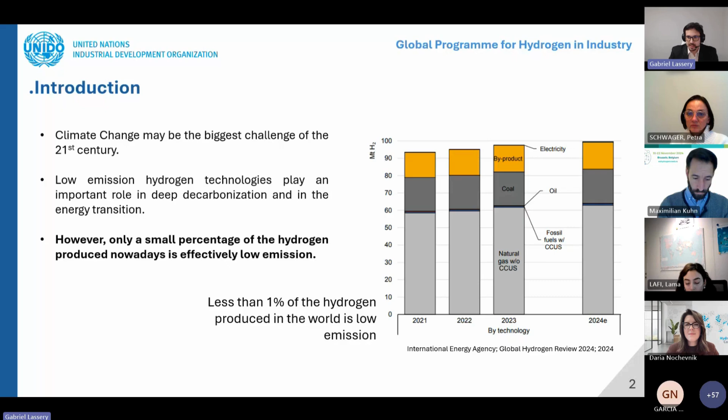I'd like to bring a few numbers over here. In 2021, the global average of emissions for hydrogen was around 12 to 13 kilograms of CO2 equivalent per kilogram of hydrogen. That means that each kilogram of hydrogen produced emitted about 12 to 13 kilograms of CO2 equivalent. And considering the IEA net zero scenario for 2050, we should lower this average global emissions to 6 to 7 kilograms of CO2 equivalent per kilogram of hydrogen in 2030 and reach less than 1 kilogram of CO2 equivalent per kilogram of hydrogen in 2050.

And moving to this picture here on the right side, I hope you can see my pointer. Yes.

But how can we ensure a fair and consistent comparison of hydrogen produced across different technologies, different sources, and different batches of hydrogen? To raise this question, I brought this picture: how much is one apple plus a star plus a chess piece? Well, it actually doesn't make much sense.

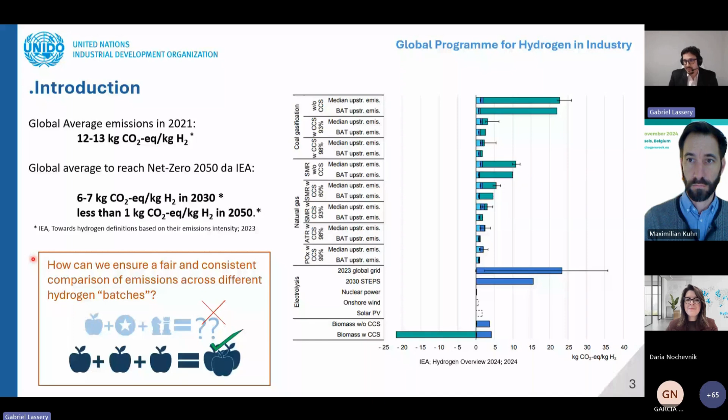The ISO TS 19870 is a unified, internationally recognized framework for quantifying the greenhouse gas emissions in the hydrogen supply chain up to the consumption gate.

The work of this technical specification started in ISO in 2023, but actually this document started way before in IPHE in 2019, I believe, with almost the same name associated with the hydrogen up to the production gate. During this step in 2023 in ISO, this document served as the basis for this technical specification, along with the family of our LCA standards, ISO LCA standards.

All in all, this document fosters international hydrogen trade and development by providing regulatory certainty, policy signals, market growth and transparency. It is a technology agnostic approach because it focuses on quantifying greenhouse gas emissions across diverse pathways, and it represents the first step towards establishing a family of ISO standards for partial CFP in the hydrogen supply chain. I have a slide on partial CFP later, but first I'd like to raise this question.

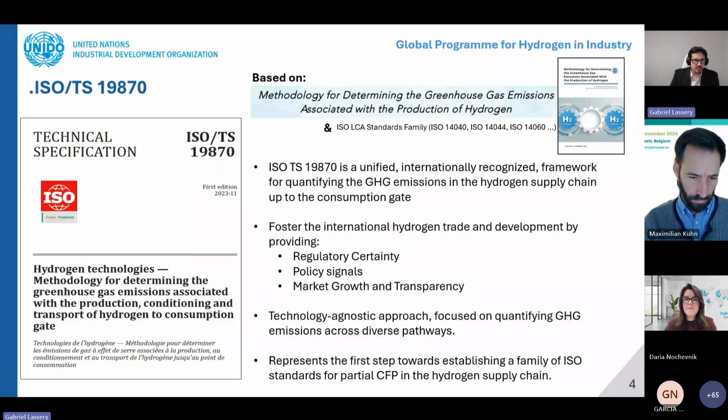What are the benefits of standardizing greenhouse gas emissions assessment using this technical specification, using the ISO TS 19870? And to help us with this answer, I'd like to invite Mr. Laurent Antoni, who is the Executive Director for the IPHE. Mr. Laurent Antoni, the floor is yours.

Thank you very much, Gabriel. Yes, I think the main question is why do we need this kind of standard? You already mentioned that a little in the introduction speech, but if you go back to the history, everyone wants now to move to clean or low emission hydrogen. Why? Just in order to decarbonize our economies.

And we know that from hydrogen, some countries will produce more than they consume, and others will consume more than they can produce. So this means we will need international trade of low emission hydrogen. This means that we need to create a hydrogen economy to decarbonize our economies. And of course, that means we need to agree on what low emission hydrogen means.

And this is exactly where we are using sometimes some colors, but I think we should all be colorblind. What matters is the carbon footprint. And that's why we need to agree how to measure, how to quantify the greenhouse gas emission from the hydrogen we want to use in order to decarbonize our economies.

And that was, of course, one easiest way: to certify that the hydrogen we are using is really low emission. But then we still have to agree on the value to quantify how low emission it is.

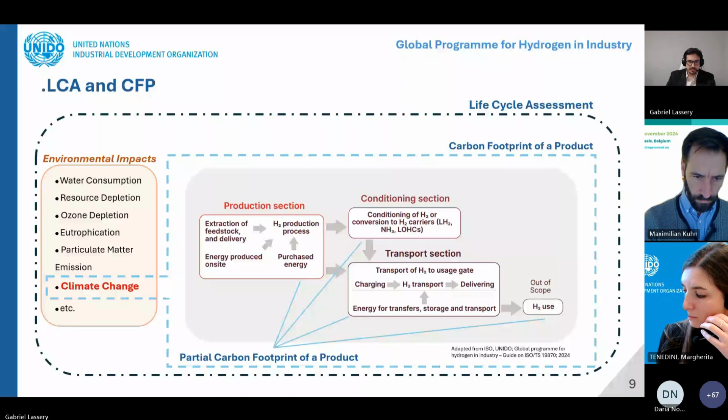For the second phase, the life cycle inventory analysis, it collects and organizes data on greenhouse gas emissions across the selected stages of this product's life cycle. For the life cycle impact assessment, it calculates the greenhouse gas emissions in kilograms of CO2 equivalent using the global warming potential coefficient and the data obtained in the previous phase. Then there's the interpretation phase, where it conducts sensitivity analysis, performs critical reviews, and reports the results.

Going into the first phase, the goal and scope definition guidelines - this is the foundation phase for a CFP assessment. One thing important to highlight is that this phase may be refined due to the results obtained in the following phases.

For example, when doing your sensitivity analysis in the interpretation phase, you may want to change the scope, some aspects of this first phase, and this is okay, this is a very dynamic process. It might happen. So the goal of this standard is to calculate the CFP for hydrogen from raw material extraction to the consumption gate. It does so by having a main body with general guidelines applicable to all the different pathways for hydrogen, and informative annexes that bring guidelines for different hydrogen production, conditioning, and conversion pathways.

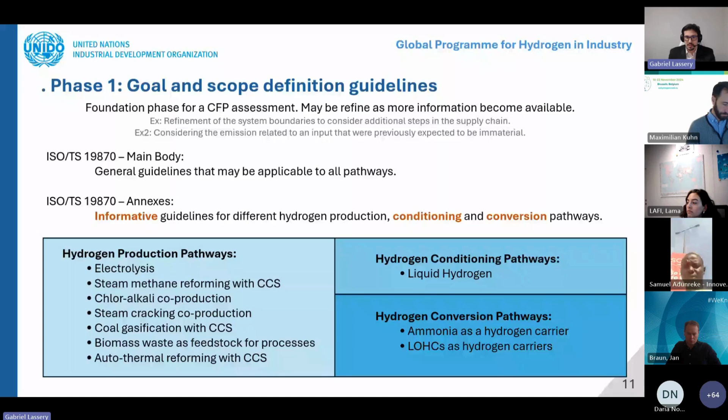Going to the scope of this technical specification, there are two possible approaches: the attributional and consequential approach. The attributional approach is a snapshot of the environmental impacts, strictly established inside the system boundary for the hydrogen supply chain.

For example, you have a plant producing hydrogen where you have flows of raw materials and energy entering the plant, and flows of emissions and co-products exiting. You can allocate all those emissions to the different co-products without changing the system boundary.

Whereas for the consequential approach, it is a much broader concept in which you can expand the boundary of the system to add another specific process from another supply chain that would be relevant for your case.

For example, hydrogen can be produced using municipal solid waste instead of letting it decay in landfills. This municipal solid waste can be added into the system boundary of the hydrogen, and the avoided methane emissions can also be plugged into the system boundary.

So the key word for the consequential approach is impact, and it's much used to assess public policies and the changes in different products and systems due to the introduction of the hydrogen system that you're studying.

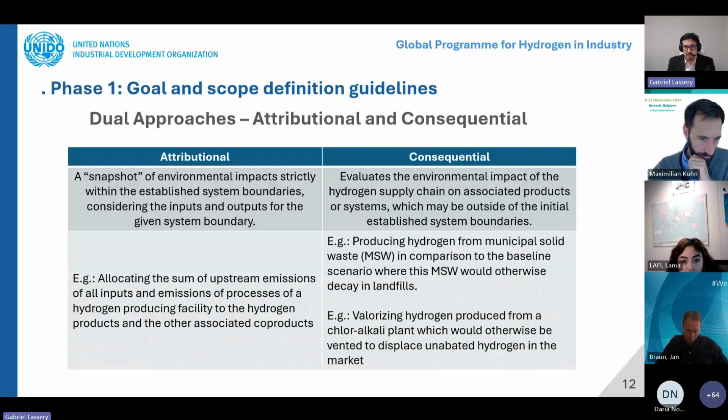Going for the system boundary, as I mentioned, the system boundary for this work covers direct and indirect emissions from raw material extraction up to the consumption gate, including CAPEX emissions.

CAPEX emissions are emissions due to the production and transport of equipment used to produce hydrogen and the energy used for this hydrogen, unless they are proven insignificant due to the cutoff criteria that I'll go into a little bit later.

There are many possible delivery gates in this technical specification. The last possible delivery gate is the consumption gate. This is where the final hydrogen arrives.

But a delivery gate may be included after each one of those partial CFPs. For example, you can have an imaginary delivery gate at the end of the production section, or at the end of the conditioning or conversion section. Then you can calculate the partial CFP for that specific stage using a module of this technical specification. So it's very versatile, very modular.

And of course, the functional unit of the technical specification is 1 kilogram of hydrogen or hydrogen product, or when hydrogen doesn't exist - for example, when converted into ammonia - the hydrogen product will be the functional unit at a pressure and purity required for the next stage in the supply chain.

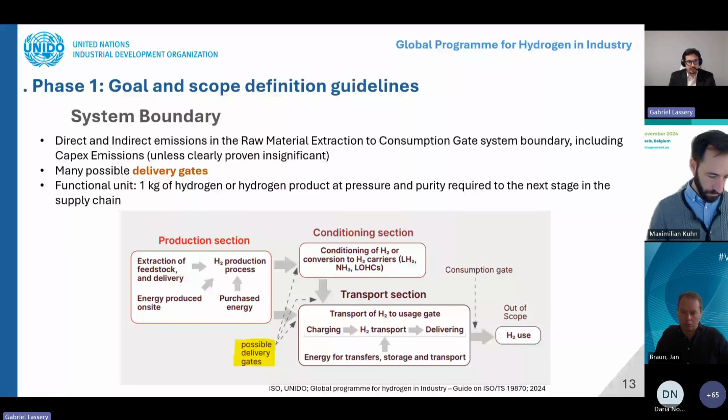For the environmental impact, since it is a CFP, it uses climate change as the category for environmental impact and uses GWP 100 as the characterization factor, expressed in kilograms of CO2 equivalent. It may use other GWP for other time frames and GTP, but only for reporting purposes. The standardized way to report those emissions is GWP 100 for the TS.

The greenhouse gases considered are CO2, CH4, and N2O, unless they are used for the reporting of capital goods, in which case other greenhouse gases may also be used according to the IPCC AR5, such as SF6, for example.

Regarding the cutoff criteria, all efforts shall be made not to exclude any processes or flows from the analysis, but they can be excluded if justified and properly documented. So if a flow or process is justifiably immaterial, negligible for the calculation, it can be excluded to simplify the calculations, providing it is properly documented to support it.

After setting the goals and scope, we go to the second phase: the life cycle inventory analysis. This quantifies the inputs and outputs associated with the product system. The technical specification gives us very good guidelines for the treatment of energy, feedstock, and transport services.

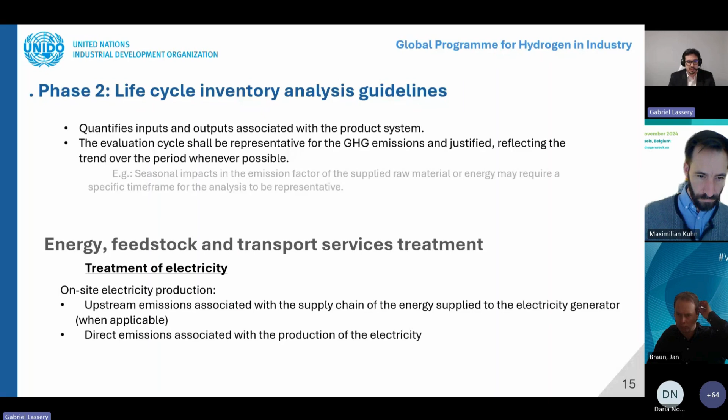Electricity can also be supplied from the grid. In this case, there are two possible approaches. The first is the attribution approach, and it can be done using two methods. The first is the location-based method, which reflects the average emissions of the grid for one specific region, for example, region or country. And there's the market-based method.

In the market-based method, it uses some contractual instruments. We use the emission factor of some contractual instruments, such as the REC, the Renewable Energy Certificates, or the guarantees of origins. So this is for the attribution approach.

In the consequential approach, it has a more broad scope. The emission factor used will be the weighted emission of processes expected to respond to the change in demand for electricity. For example, you are pulling electricity from the grid in a place where it's generated through different processes, sources, and technologies. The impact expected to be felt in the grid is the increase of all those different processes and sources, as they have to increase to produce more electricity that you are extracting from the grid.

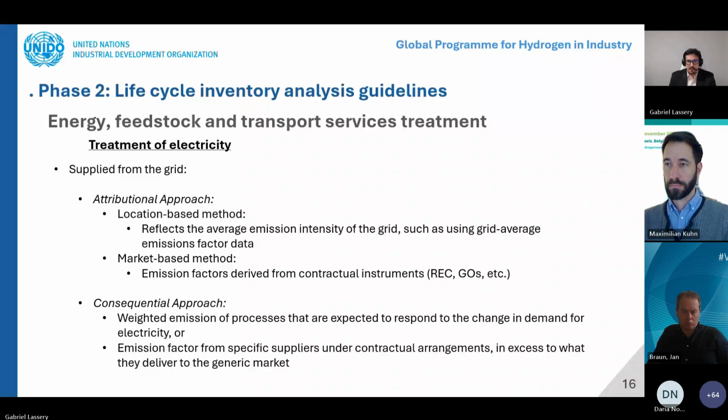Then we get into the life cycle inventory analysis for the treatment of steam and natural gas. They are both treated very similarly in the technical specification. They can both be supplied either as energy or as feedstock, and the emissions associated with the production and supply chain shall be allocated to the co-products. The difference is that steam can also be one of the co-products, so when that is the case, part of these emissions shall be allocated to it.

For natural gas, section 4.3.2.5.4 provides very detailed guidance on how to assess the emissions for this upstream natural gas. There are actually three different ways to do it, one having priority over the others, based on the granularity of this emission factor. The more granular, more reliable this information is, the more precedence it has over the others.

For emissions in the transport sector, all vehicle and hub equipment that operate the transport services shall have their emissions accounted for. The TS has a detailed section on this. It includes all the emissions for freight transport, external handling, and energy provision and leakages for the transport sector.

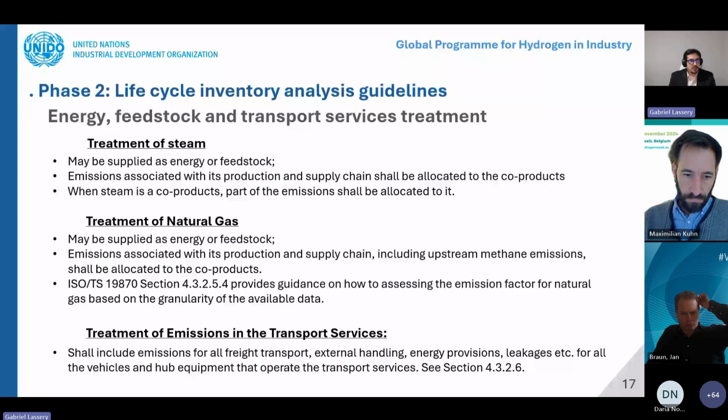The next step is carbon capture emissions. All emissions associated with the process of capturing and storing this carbon, such as the electricity and fuel used for the process of carbon capture, have to be considered in the inventory of emissions and have to be allocated to the different co-products.

In the case of CCU, there are two different approaches. For the attribution approach, no emissions associated with CCU will be taken into account, since the system boundary of the attribution approach doesn't count the utilization phase. But for the consequential approach, this utilization phase may be brought into the original system boundary, and accounted for in the different co-products.

For emission allocations, the TS 19870 brings a detailed decision tree algorithm. Emissions must be allocated to the different co-products according to a clearly stated and justified allocation procedure. What I'd like to highlight is that whenever possible, allocation should be avoided by doing subdivision or virtual subdivision. If that's not possible, and if consistent with the goal of the LCA of the CFP, system expansion and substitution shall be used. If none of those are possible, allocation shall be done to the different co-products using physical attributes such as their mass or their lower heating value.

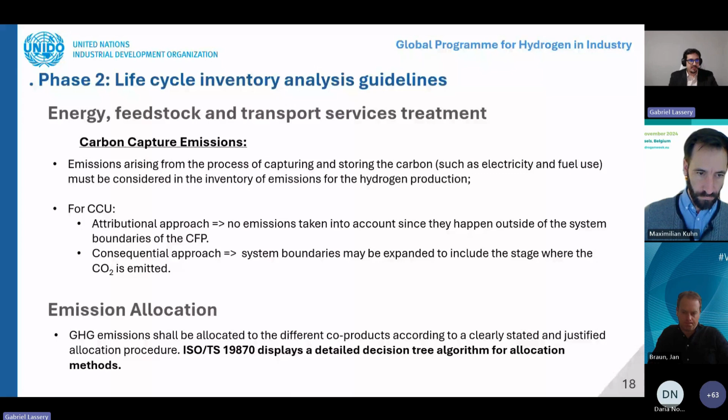Okay, so we finish the second phase of the life cycle inventory analysis, and we start the life cycle impact assessment guidelines.

The life cycle impact assessment summarizes all the steps and work done in the previous phases, and it aggregates and quantifies the data for all the stages under this assessment. For each stage, production, conditioning, conversion, and transport, all emissions, combustion emissions, fugitive emissions, industrial process emissions, energy supply emissions - this is the case for example for treatment of electricity - and upstream emissions will be summed up to compose the emissions inventory for that specific stage. After having all those emission inventories for production, conditioning, conversion, and transport, you sum all of them to get the total emission inventories for your whole assessed system, your whole assessed supply chain.

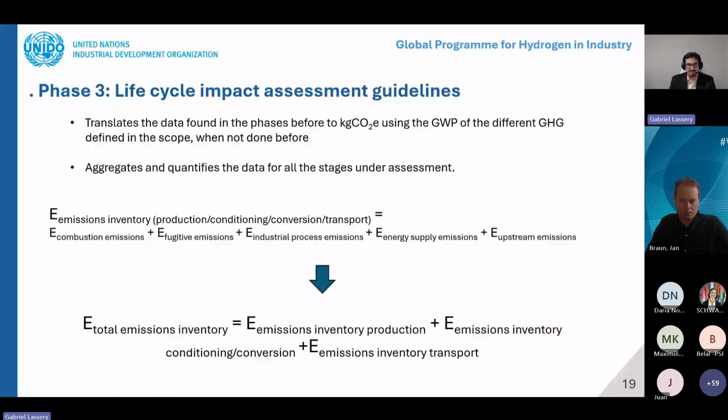After this third phase, we start the interpretation phase, the fourth phase of the LCA. The goal is to analyze the results from the CFP and identify issues and their conclusion. Based on these results, the goals and scope definitions may be refined, because as I mentioned, it is a very dynamic process. It may be iterative. The calculations may have to be redone to make it more robust.

The TS brings a recommendation to prepare a life cycle assessment report. This report is a comprehensive document to show the findings and approaches that were used, the methodology, the data quality criteria, the assumptions and limitations, among others, of the CFP study being proposed, and also indicates the possibility of performing a critical review. A critical review is generally done by a third party, and it's important to bring transparency and credibility to the CFP study that was done.

So for the next development in the ISO TS 19870, this is the first step of the methodology. The 19870-1 is under development and it covers the hydrogen production stage. It's being worked on for the year 2024. There will be the 19870-2, 3, and 4, which will cover the other stages in the hydrogen supply chain. Since this is the first step, the content of this document is subject to change based on future revisions of this technical specification.

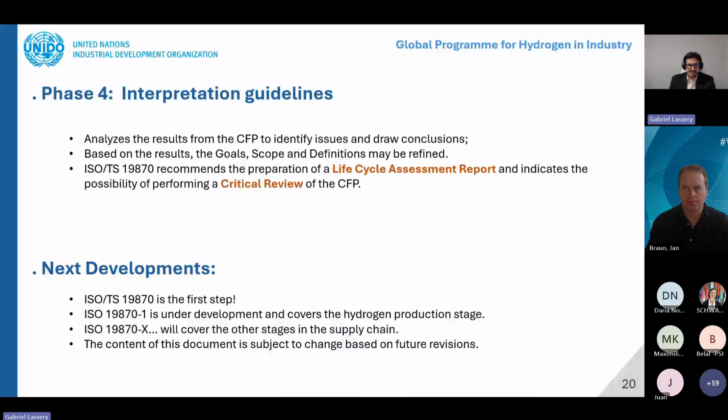Thank you so much, I think that was it. I think I spoke a little bit too fast, but I hope it was understood. We still have some time for some Q&As.